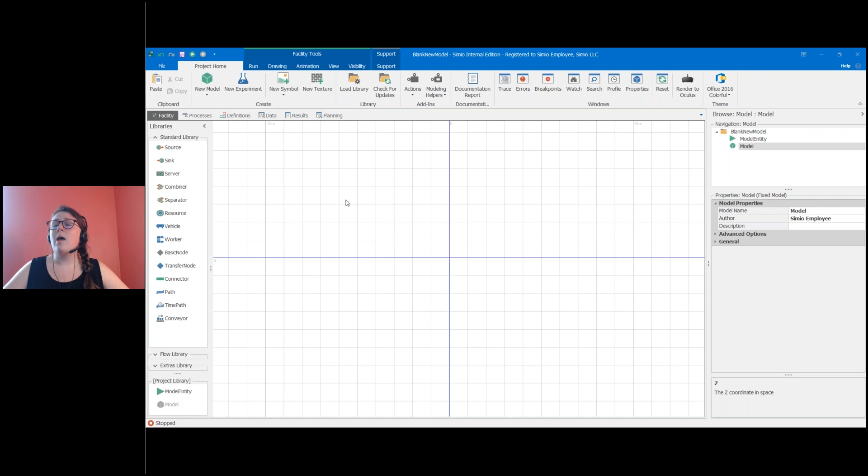So with that, let's jump into Simio. And here is my blank model. First, we're going to talk about getting data into Simio.

So you can just type your data into Simio, or you could copy and paste your data into Simio. But one of the quickest ways to get data into Simio is to import it. So you can import it with a table data binding.

So first, we have to have a table to put our information into. But then after that, we can create up our data binding. So if we go to content, create binding, you can see we have options here.

So you could import from an MES system, or you could import from a database or Excel, but today we're going to do CSV. So I select CSV, and we see we have some information to fill out here. You don't have to fill it out now, you can fill it out later. You can close it, but we're going to fill out some of this now.

So we're going to select the folder where all of our CSV files live. Let me get here really quickly. Okay, so I have my data folder. I have my layout information in this layout folder.

So I specify my folder, and then I need to specify the specific file in that folder. Here I have multiple files. These are the objects I want to be creating today, but we're going to start with racks.

So I've hooked up my data binding, and then I have to import the data. So I import it, and I can see that Simio made my data table schema for me - it set up my column names. I could have had these set up before.

I could have said, these are the columns I know I want to import, and then I could have just added the data into that. Or if you don't specify that, like we just saw, it'll create your data table schema for you, which is really nifty. So here's all my data.

If I go back to my facility, I can see nothing's really happened yet. We have yet to turn on the switch to data generate our objects, but it's very simple. Before we do that though, there's a few things we need to clean up. So Simio is going to do its best to try to make sense of the information you're putting into it.

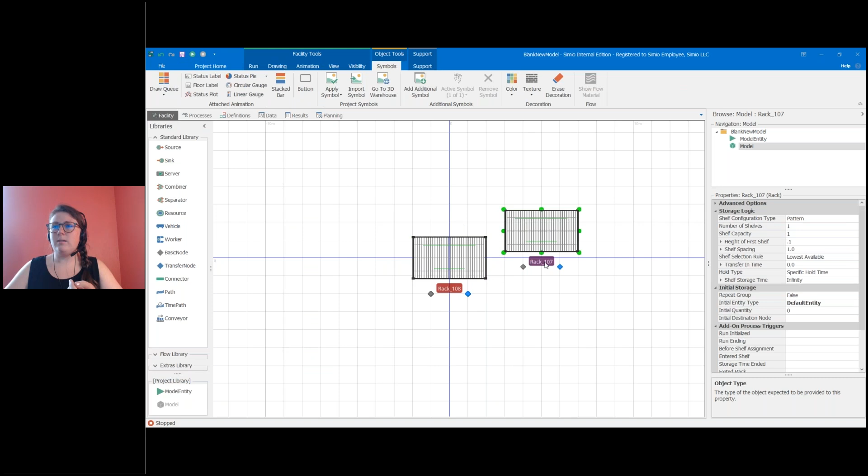Great. So all the errors are gone because I said I've created these with my data. And I go to my facility and I see they're here, but they are all in this center area because I did not hook up any of my other information. So we do need to do that fairly quickly.

So I can go back to my data table, select rack, go to the initial physical characteristics, and I could type a value in here, but this is applied to the whole column. So all of the racks would follow that rule. But I want each rack to be at a unique location. So I can instead say the unique value column here.

So I have my X location, my Z location. So if I reference the column instead, so X location and Z location, I can see that each rack is going to use its own value for these two columns. So I can go back to my facility, and now I can see I have something that looks a bit more like a warehouse layout.

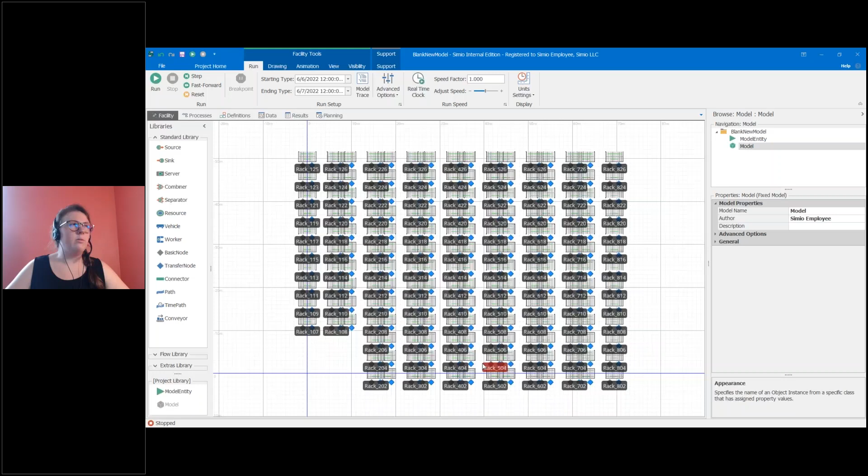I have my racks spaced out, but they are facing the wrong way. So this is where the orientation comes into play. And so we can go back to that same location and change the yaw. So the yaw is which way the object is going to be facing. And again, I want to reference the orientation column because some of my racks are going to be facing 180, some are going to be facing 0. And I go back to my facility and I could see that things have gotten lined up a lot better now. Okay.

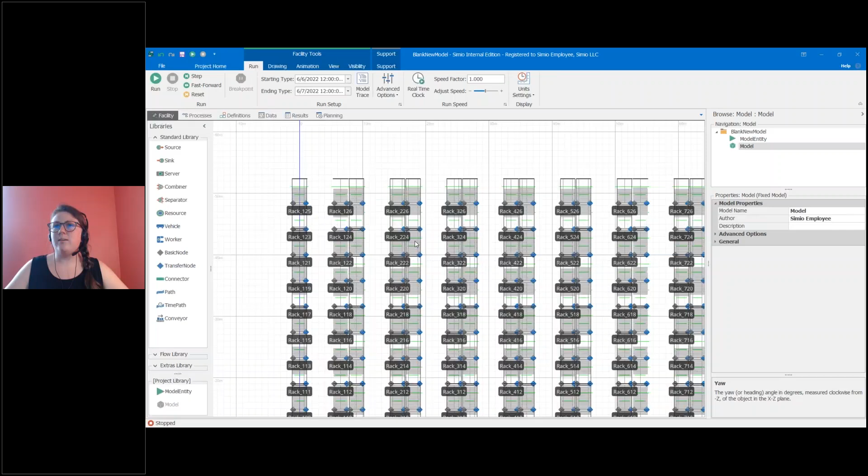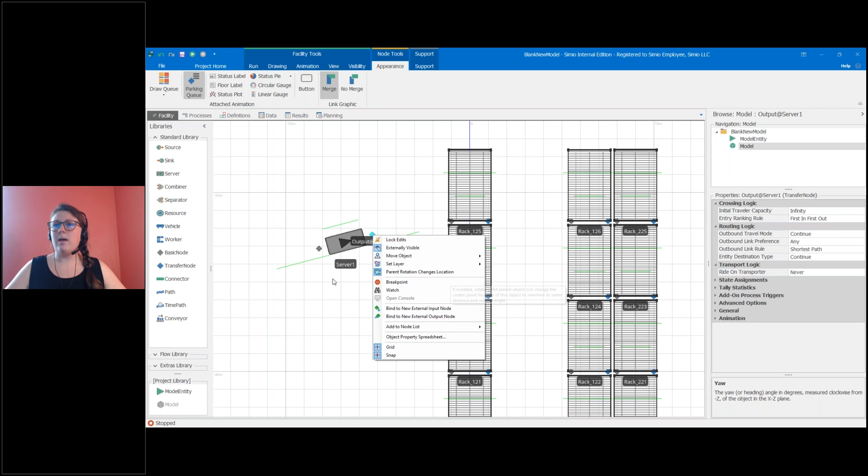With the rack, we have our input and output nodes, and you can see that those didn't move correctly. So I just want to take a moment and talk about this. With the server object, if we wanted to rotate this, you can hold control and click one of these handles and rotate and kind of just drag around. And you'll see that the queues and the nodes are moving with the server. That is because if you right click on the node, you can see it has this parent rotation changes location active. And same with the queue. The queue has two different options because it can move in different ways.

But if we click on our rack, we can see that we don't have that turned on right now. So we're going to want to turn that on. And I could click on each of these nodes and turn that on, but that's not really going to solve our problem because we want it to be applied to all of our rack objects. So what I'm going to do instead is I'm going to make a custom rack object so that I can make that the default value. So any rack I create from that custom rack object definition will have that rule applied to it.

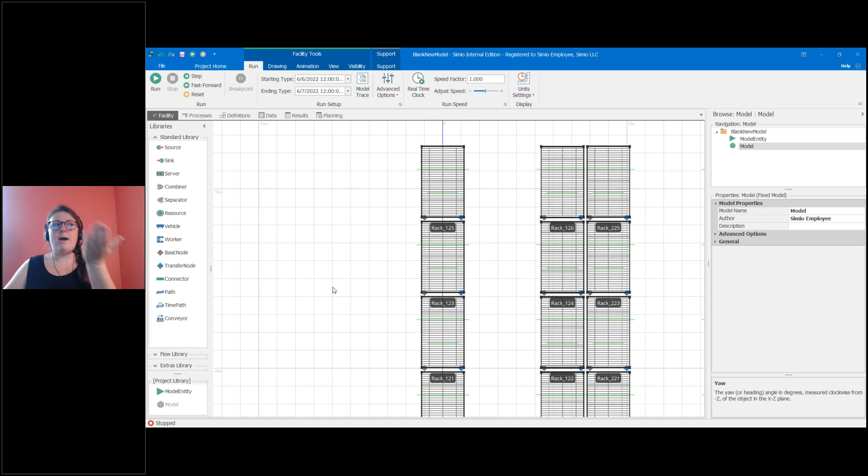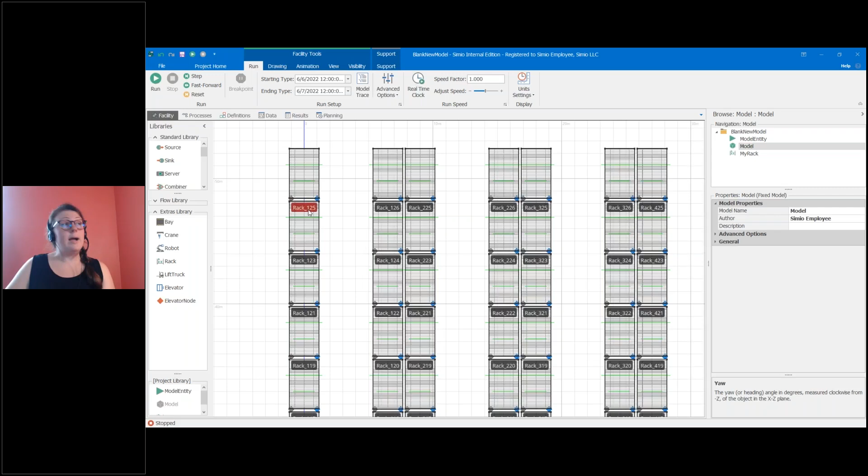So here I'm going to go to definitions, external, and I see that these are my external nodes that get created when I place my rack. And I can right click and I can set this as the default value for these nodes. So now I see it's enabled. Okay, if I go back to my model though, I see that nothing's really changed. Well, the racks I created were created using this rack definition. I need to change it so it's using my new MyRack definition.

So we're gonna go to data, and all we have to do is change that object type. So I can go here and I could do, oops, MyRack. And it's gonna take a moment because it has a couple hundred racks to do. We'll just let that think for a second.

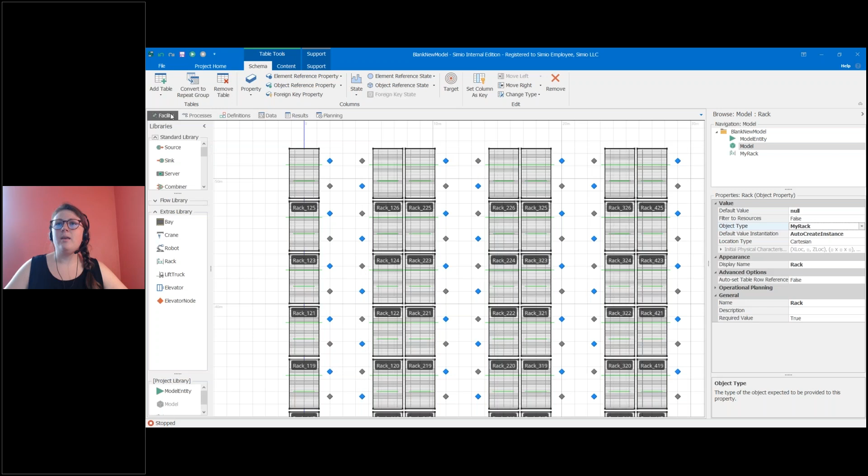And now I see that my nodes are in a better position and line up with the way that my rack has been oriented. Okay, great. The last thing I want to do is make sure when I auto create, each row in my data is its own instance. So this is a rack instance and this is a rack instance.

But when you're auto creating, the rack doesn't automatically know its row. There's a setting you have to turn on, auto set table row reference, and you can change that to true. And so then each instance will recognize its row, and then you could use information in this data table later on.

Hey, Liz, let me ask a question that just popped in here that's very relevant. So, do the CSV files have the field names as the first row, and is a header required?

So the data that I had, I did have my column names in my data table. So maybe I could show that really quickly. Oops, popped up over here. But yes, my first row was my column titles. So you could include that in your data. If you don't, there are settings, I think, when you're setting your data binding to exclude the headers or say that there is no headers, and then it'll just come in with unnamed columns.

If you don't select that option, it is automatically going to try to use your first row as your table headings. So if I didn't have this row, it would have tried to use this information. So you do want to be a little wary of that and make sure you change that setting if you don't anticipate having column titles in your data. But yeah, those are all settings that you could change.

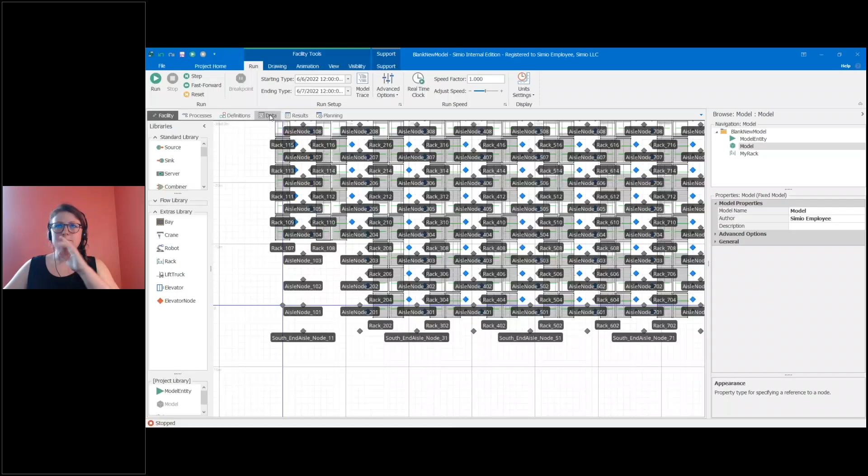And I can go to my facility and see that I now have a bunch of nodes in between, marking out my aisleways between the racks. So for the sake of time, I'm going to skip showing how to do the other tables because it's a very similar process. So we're going to jump to another model.

Hold on. Another question. So in the rack table, is it possible to specify relative locations of input output nodes with respect to each other?

So the rack definition is going to create those nodes for you. So you would have to specify that in the rack definition, or you could have your rack definition not create those nodes and then create different nodes in the data tables. So there'd be a few different ways you could set it up. It would really depend on you changing your rack definition. But let me just jump back into that for a second, actually.

So what I'm saying is the rack is creating these nodes here, and you could move them around and then auto create your rack, and it would change. So I'd have to update this for a second. But if you wanted to specify different locations for your input and output, you would probably need to create different nodes. They would need to be their own node definition, if that makes sense. Really, really quick.

Okay. So we see that now when I recreated them, the nodes have moved locations. So you would specify it in your definition, but you could choose to not create these nodes and then have a table with all your other nodes creating different inputs and outputs for that.

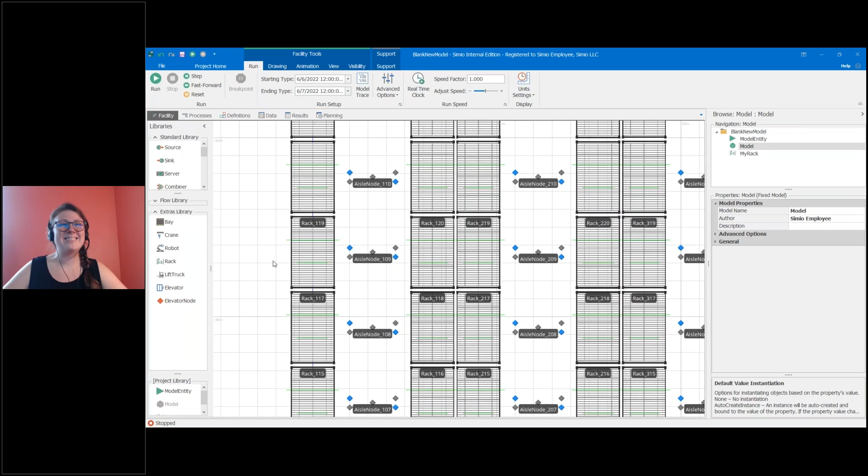Perfect. Clarification on that, yeah, you can email and we can talk about that more later. Okay. And we also have user participation occurring as well. So someone else is jumping in and answering questions as well in there. So that's great. Awesome. Okay, perfect.

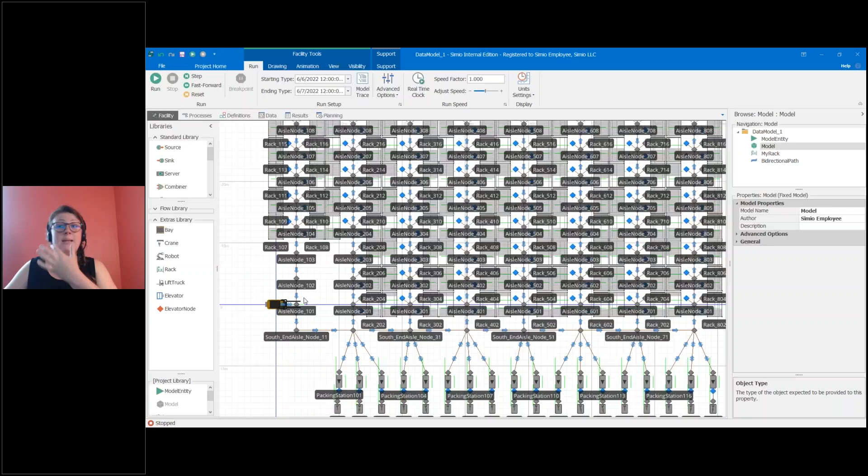Okay, so we're going to jump over to a different model where I have auto-created paths, resources, so my forklift and some workers who work at my picking stations or my packing stations, some sinks and the packing stations. So these are all just different pieces, like files of data that I've imported as a table and done those steps that we have just seen. So now we see it's created all of these lovely objects, and it was pretty simple to do. You're just importing, kind of formatting a little bit, making sure everything's hooked up in Simio correctly.

All right, awesome. So it's a little busy, so I'm going to turn some of these things off for a second. But we can see this model. If we hit run, it's actually not going to do much of anything yet. We haven't created any entities or hooked up any other pieces of information in there. So we're actually going to switch gears and talk about data-driven approach now. So what we just did was data generated, and then we're going to move to a data-driven approach. And these are two different approaches. You can do one without the other.

So we could have just had our data generated objects, and we could click on each of these and fill in the information about the racks and whatnot, and click on these servers and fill in the information here, so that would be just data generated, or you could do vice versa and only do data driven. Entirely up to you, but the two approaches work really well hand in hand, because you can quickly input the data that you need for these objects into data tables and then create the objects. Okay, let's jump back to the presentation for a second.

And so moving on to data-driven approach. So data-driven is your data is organized into tables, just as we've been doing. And again, you can type this in or you can import the information as we have done from an external file. And what this is, you're using the data in your tables to drive your objects. So you're going to plug in your table references into your objects, and it's going to be a generic table reference, which is really nice because it's repeatable very easily across multiple objects.

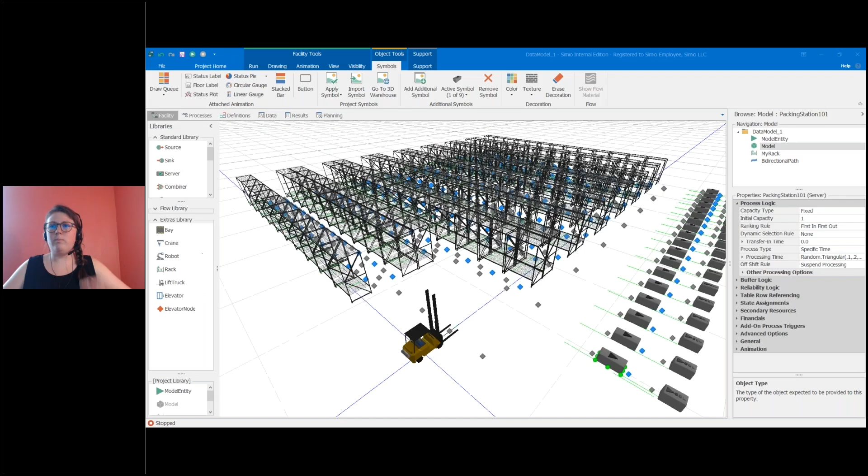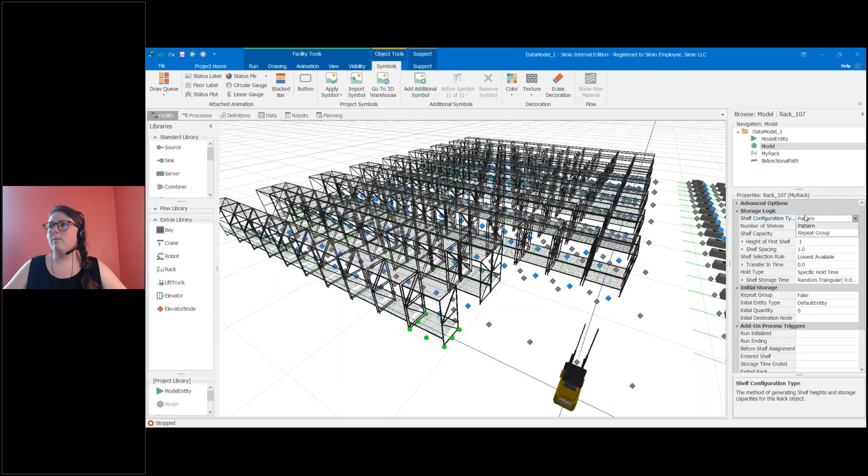So we're going to want to give some information to the racks to create these shelves. So with the rack object specifically, we have the ability to create shelves at different levels. So you can specify how many shelves you want, what's the pattern, how many entities are allowed to fit on a shelf, and so on. So by default, that is a pattern option, but we also have this option to do a repeat group. And what the repeat group lets us do is have each of these shelves be unique. So instead of saying I need 3 shelves and they all have to be evenly spaced,

here we could say I have shelf 1. So shelf 1 is at height 1 and it can hold maybe 10 things because it's a bottom shelf. And maybe I want to add a second shelf and that's going to be shelf 2. And I only want to move it up a little bit. So it'll be 1.5, a little bit higher than the first shelf. And it can only hold 5 things because it's a little bit higher. We want to put less on it or something like that.

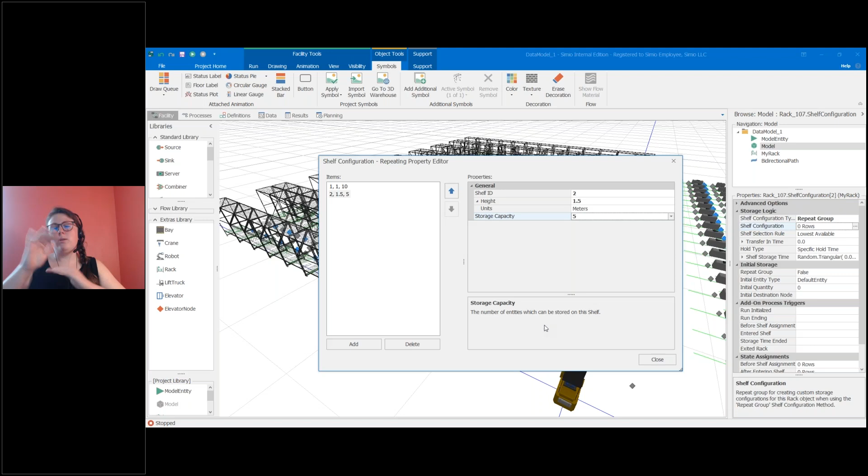So the repeat group allows us to create shelves with unique information. So I could go into each of my racks and I could add this, or I could put it into a data table. So my data table holds all of the unique information about my shelves, which is what we're going to do. So let me just delete these.

So repeat groups hook up very well into data tables because they're actually very similar structures. And if you ever need to get more information about repeat groups and what that might look like in a table structure, we actually have our data table schemas. So if you add a table, you can go to add a data table from schema, and we have all of our options here, and these are all of our objects and our elements.

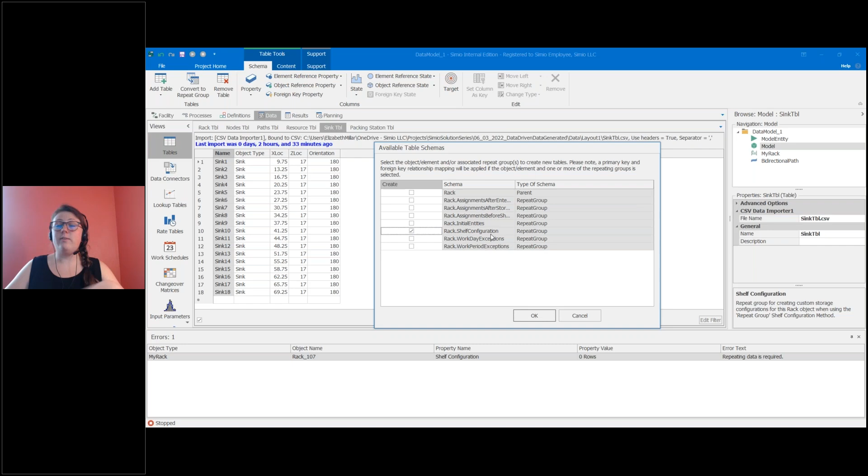And so for example, let's go to rack. That's what we're working with. And you'll see for the rack, we could make a parent. So that would be like the rack's properties in a data table, or we could create one of its repeat groups. So here we're just going to quickly look at shelf configuration. That was the repeat group we were looking at. And if I add that in, it's going to make a table for me that has the columns that correspond to the properties that were in that repeat group.

So if you ever need some assistance in setting up your data table schemas, that's a good way to look at it and just get an idea of what these columns might be. Okay, I'm actually going to delete these columns because I want my data import to create them for me like we've done before, just because my columns are set up a little bit differently. So here we're going to do the same thing where I take my same binding, and select my file from my shelf configurations, import this, and make a few changes.

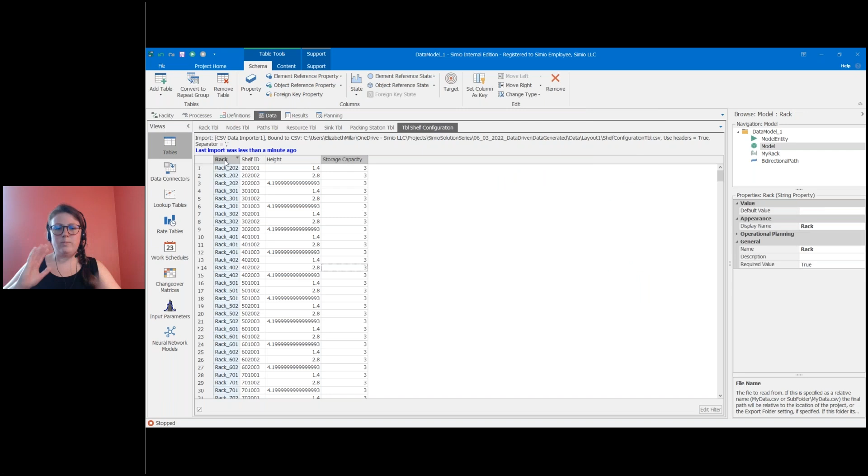I want my shelf ID to be a string instead of a number, since I only have numbers here. We're going to change that quickly. And this is where we want to introduce the idea of table relationships. So here I have three shelves per rack. So I have this rack specified, and it's going to have a unique shelf. But this is where we want to relate all of these shelves to the one rack.

So I have this column, and I actually want this to be set up as a table relationship. So I'm going to go back to my rack table, and I'm going to say, hey, I have these racks, and I want them to be a key. So I'm going to set this column as a key. So each rack is one key, and it's going to relate back to this shelf table. And this column is going to be a foreign key. So I'm going to change this to a foreign key.

And it's going to say, okay, I know that rack 202 has these three shelves, and it relates back to the same key. So I've used this key 3 times. So if I go back to my rack table, I can now expand this and get this master detail view. So I see that rack 202 relates to these three shelves. So this is where the power of table relationships comes in, where you can say, I have this main piece of information and it's going to relate to maybe the subset of information. So in this case, I have this main rack and it's going to relate to these shelves.

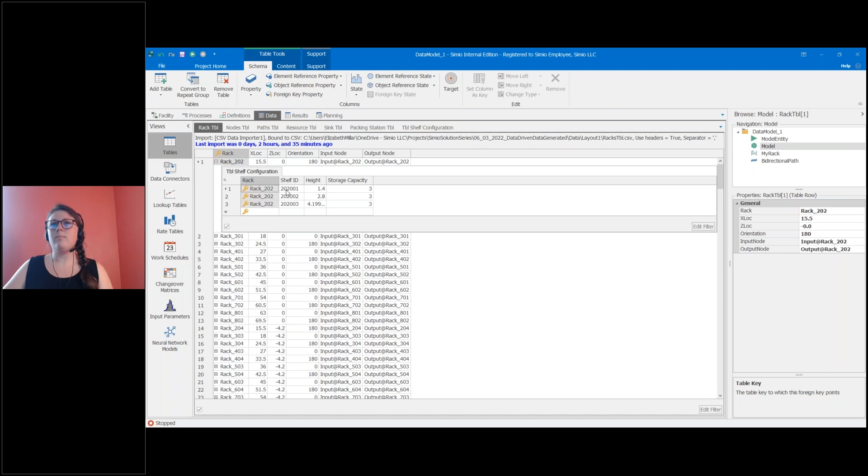All right. So going to facility, I can click on my rack and I could say, for my shelf configuration, I would like to use that shelf table we just added in. So my table shelf configuration. Okay, so I right-clicked on the repeat group and I set this reference at the top level, and I could still click into the repeat group and see that all of my columns in my data table hooked up to the properties in the repeat group. So we have this all set up.

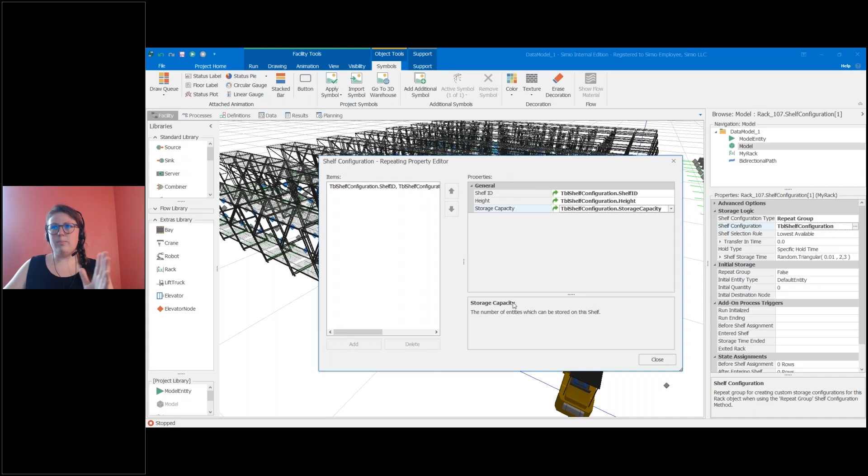So when this rack goes to create its shelves in the beginning of the run, it's going to say, okay, I have these 3 shelves to create and they have this information. But this is only applied to this one rack. So I could do the same thing. I could click on this rack and add that same information and change these properties. Or what I could do is say, this is going to be the default for my rack definition.

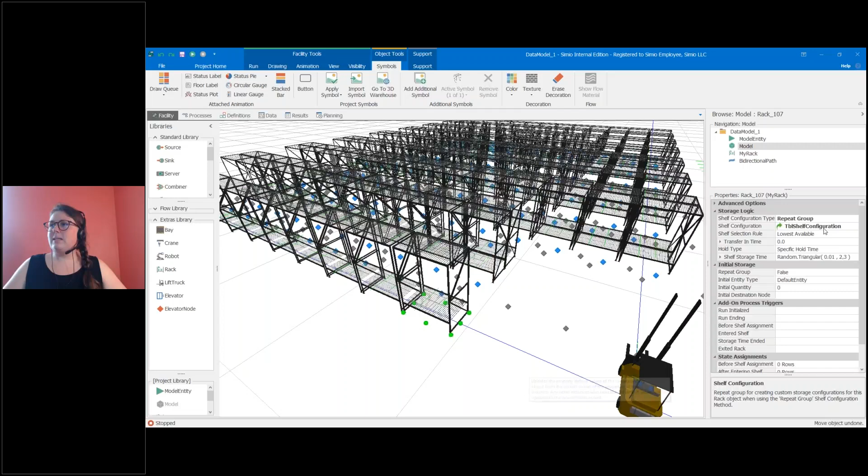And I could do that very simply by right-clicking on the instance I have changed. And I could say, update my rack property defaults from this. So this is updating my object definition. And I could see that this unbolds, meaning that it's now a default. And I could click on all of my other racks and see that it is the same values now. So it has applied that default property values across all of the other racks that are from that definition.

Run. I can see that I have shelves created, which is great. But I have yet to have entities. So we actually need to do one other quick thing, and that is give an initial quantity. So I'm just going to say 9 because I have 9 spaces in my rack. And again, I want to update. So all of my racks are going to have initial quantity of 9.

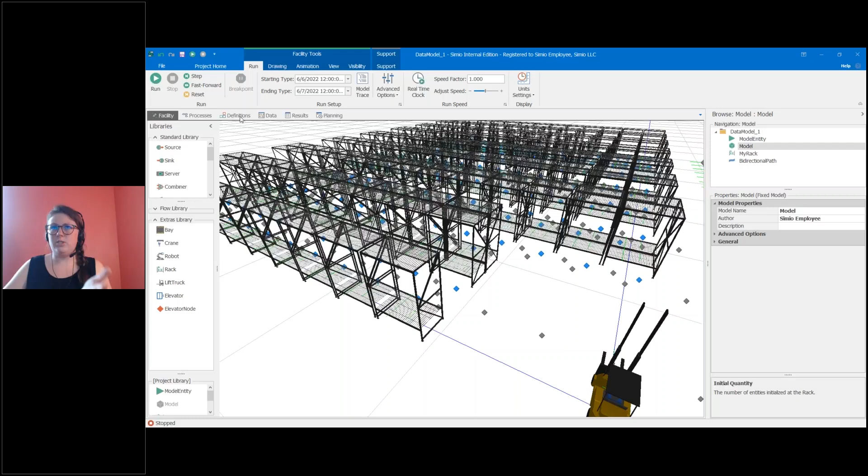But that is information you could also store in a data table. So maybe you have your data table specifying, we have this stock at these shelves, and you could hook that up to these properties and say, I want this entity to start at this shelf. All right, so now if I run, I see my entities on my shelves.

Great. And then one other thing I wanted to show is in your shelf table. So again, the power of having this be in a data table or use that shelf configuration repeat group is that you can have unique values for each of these shelves. So let's say I wanted to change this where I actually wanted my highest shelf to only be able to hold one entity. Right now, everything holds 3 entities.

So with your data tables, you can filter on certain items. So you could use that little key up here and you could select certain things. Or you can use this auto filter row, which is really nifty and lets you filter on different kinds of criteria. So here we're going to select ends with, and I'm going to say I want all of my shelves to end with 3 because my shelf IDs, the third one is the highest shelf. So here I have all of my 3s,

and I could change this to say I only want to hold 1. Oh, since this is still bound, I would need to remove the binding. So I'm going to remove the binding really quickly because if I have the binding, it's going to want to stay true to that data file that it is bound to. So if I remove the binding, now I can edit this and I can say 1.

And again, our data tables are copy and paste friendly, so I can select all of these cells very quickly and paste them in. And I'm just showing this, but instead of doing this, you could have another data file with maybe a different configuration of shelves. So you could test different shelf configurations and you could import different files. So you can kind of have an experiment where you're changing your files.

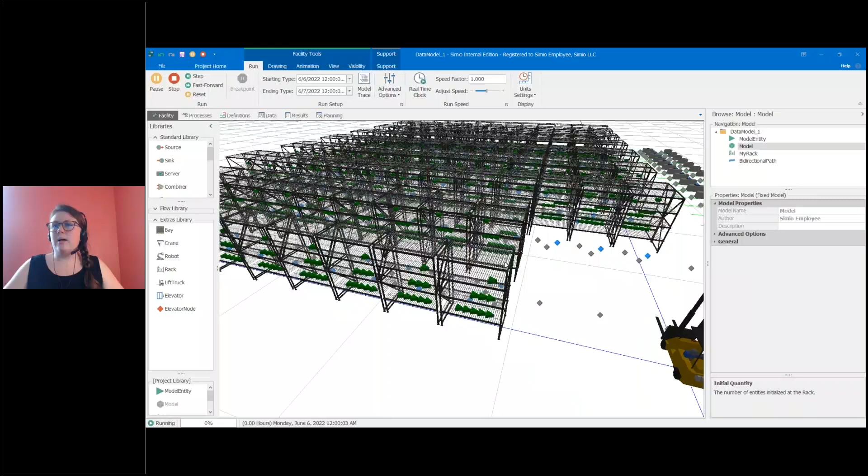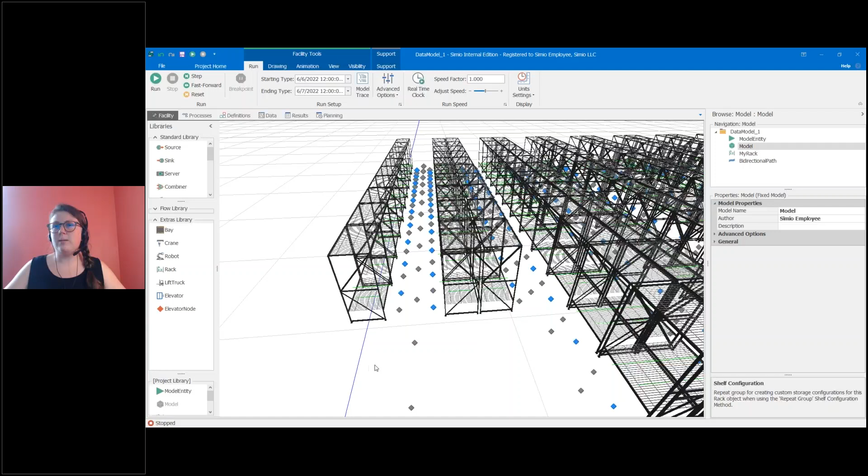And one other thing I wanted to show, so now our shelves are data driven. They're using the information from our shelf data table to create the shelves. But I also want to have my entities routed using the data tables. So as the entities leave the rack, they, one, need to request a ride from the forklift. So we're going to need to change that on our output node.

So that's where we say, does it need a transporter? And we're going to say always. And we're going to say we need a forklift. So that was another one of our objects we had data generated. So here's our forklift. And I want to say, instead of continuing, we're going to select a location from a list. So our data tables can actually also be lists.

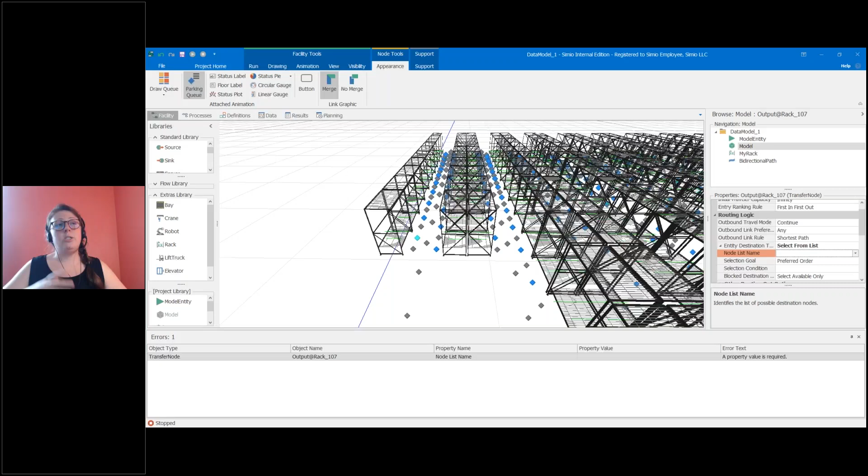So if I go back to the data table, the packing station is where I want the entity to go after it's taken off of the rack. And in my packing station data table, I have this column for input node. So here I'm saying these are my input locations to my packing stations. I could use this column as my node list, which is what we're going to do. So I can go back to my facility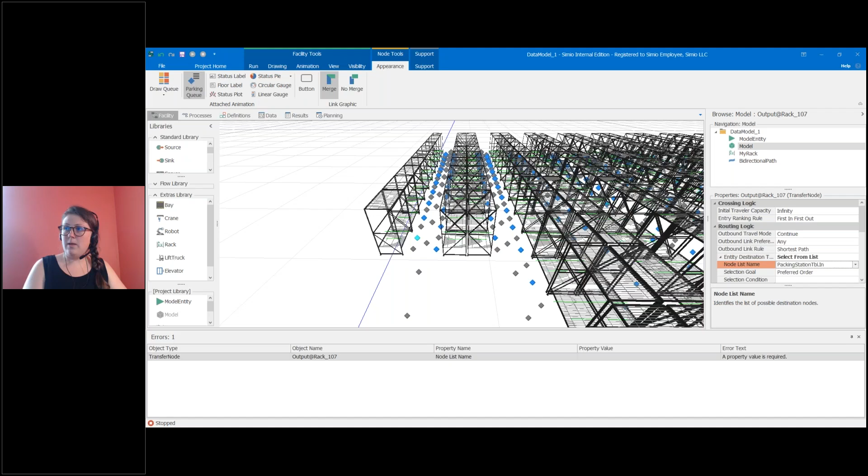and we're going to do packing station table dot input node. And oops, I did not type node. Perfect. Okay, so now when I select from the list, I'm going to look at that data table column for the nodes, and we're going to select something from there.

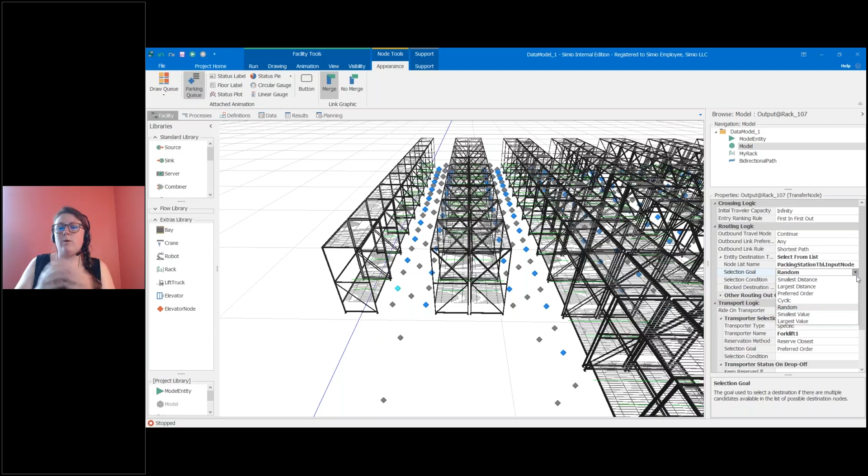And just for this example, I'm going to choose random, but this is a location where maybe you could think about, which packing station do I want to go to? Am I trying to match up with another order? Am I picking different things to put together for an order? So maybe I need to check for that. Or maybe I just want to go to a packing station that's available, least busy, something like that. So we're just going to go with random.

I've only set this for this one rack, and this is the node associated with that rack. So if I go to this node, it doesn't have any of that information, but I can do that little trick to right click and say update rack property defaults from this. And it's unbolded now. We can click here and see that this is also updated to say I need a forklift, and we're going to select from a list and so on.

All right, choose the speed and let that run, and we're going to see that our forklift is going to go and pick things up and drop things off at one of our packing stations.

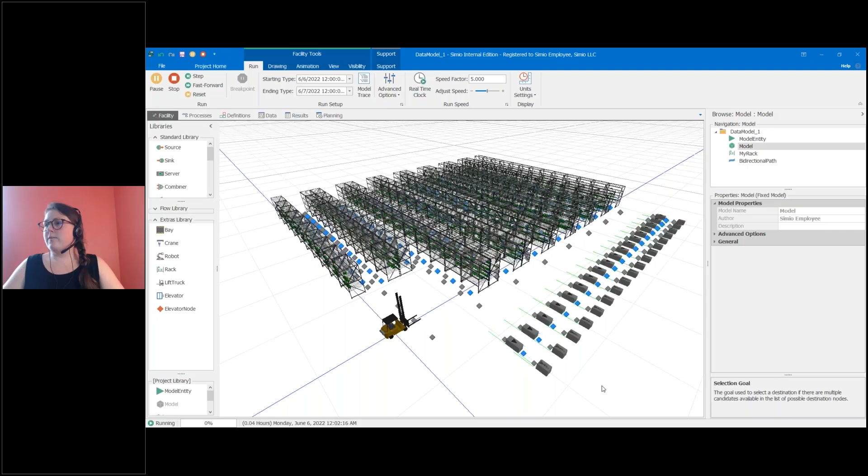I'm going to skip through a couple things, but there are a couple other enhancements you could make to this model, like also having it be data driven. So you could select a server and change its processing time, and that processing time could be read in from your data table. Maybe your data table has different processing times for each packing station.

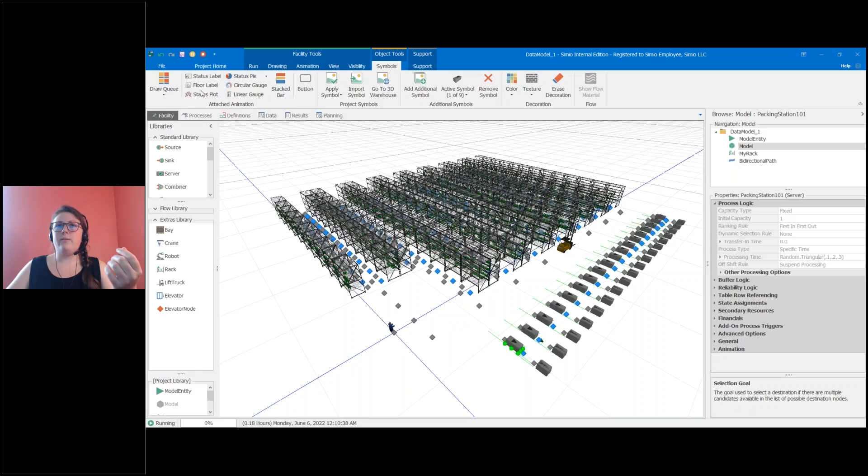Or for our worker and our forklift, we could change the population number. If I pause this for a second and go back to data, we have our resource table, and we have this column here for population. So we could hook up this column to our worker and our forklift, and say we would like you to use... oh, it needs to be an integer—can't have not a whole forklift. So you can say use this table reference as the population.

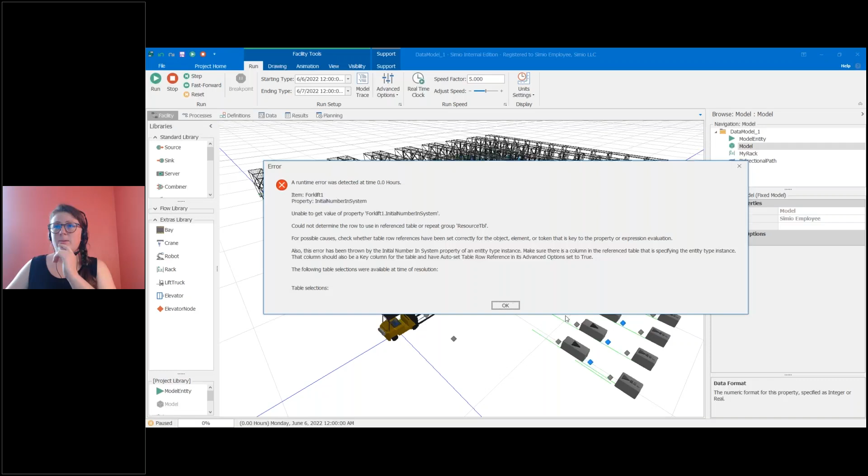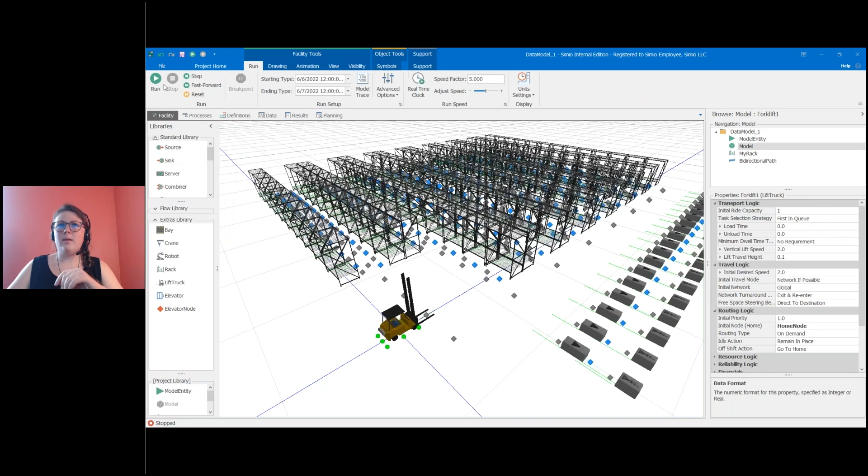If I hit run now... oops, it did not know which row to use, and that is because this needs to be a key. So now I should have multiple... oh, nope, we're still only doing one. Okay, well that is something you could set up. I'm not sure why... oh, they're on top of each other. Okay yeah, so we should see 3 forklifts as we run this model.

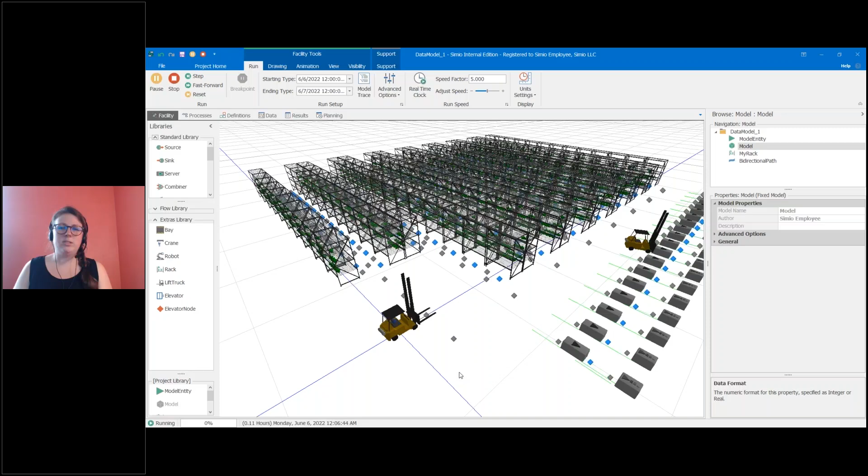And that could be something you could consider making multiple files for. So if you had a bunch of different vehicles or workers and you had population specified in a table, we could see changing that file and trying different populations. So you could change the file to change the population number instead of making that a reference property and changing it in an experiment. Okay, so we see our 3 forklifts now moving around.

Awesome. All right, a few other things I wanted to get to before we get to the questions, and that is showing some of the other things you might think about doing with your data tables. For example, we now have these shelves individually listed out. So if you wanted to collect information on each of the shelves, you can consider doing that, like adding more columns, adding a state column, and maybe counting something.

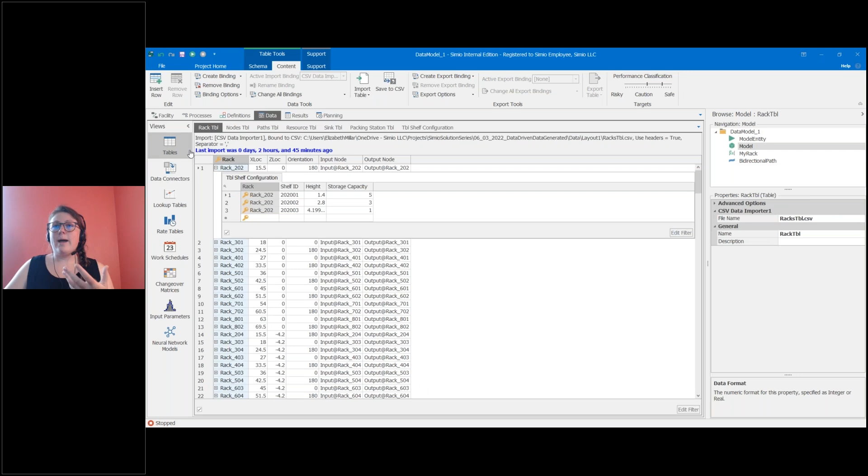The shelves are going to have information they automatically collect, but if you wanted to collect your own statistics, you could think about adding that in here, because now we have this shelf detailed data table. Similarly, for the rack, you could think about collecting how much weight is being stored on a rack. So we could consider adding in a state column and saying this is a state variable—each one of these cells is a variable that corresponds to this row.

You can see that's grayed out and I can't type anything in there, and that's because this is only assignable during the run, so you're going to update this value as your model runs. So the state column could be the weight. We could collect the weight as entities are put onto a shelf, add the weight, or as they're removed from the shelf, subtract the weight from this state variable. And then we could also think about auto-creating elements.

As I said before, you can create the objects, but you can also auto-create elements. You'll see we have our element column properties up here. So let's say we wanted to collect a state statistic—over here we have the option to reference or to create. If we create, we can set initial property values. So if I open this, I could say what is the state that I want to collect? The state variable name, and it could be that state column we just created—so it could be rack table dot real state 1. So it's going to look at the state variable that is in the state column, which is really cool.

So why are we doing this?

Maybe we're using that state to collect the weight of the rack, and maybe we want a state statistic because we want to be able to see what the rack's weight is over the span of the run. So the state statistic is going to be a time-dependent statistic. You could see how it changes throughout the run.

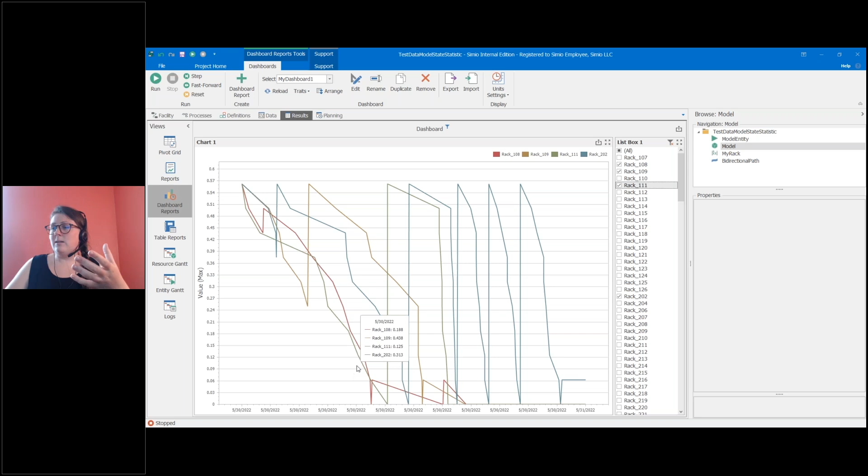The last thing I wanted to talk about was experimenting with your data bindings. As I first showed, we imported our data and created this data binding, or data connector, our CSV connector. If you go to data connectors, you get a summary of where this data connector is used, what tables are hooked up to it, and what this import folder is.

And we could create more data importers. But what's actually a little bit easier, I think, is to create different configurations for each data importer. So here I could add a configuration, or just leave it defaultly named. And this one lets me change the folder that I'm looking at.

So maybe instead of my layout 1 folder, I want to look at my data for layout 2. So I could say look at layout 2, and if the files were named differently, I could specify the file names. They happen to be named the same. So I could hook up which file goes to which table and all of that.

So jumping to, I hooked that up previously. Here I have different layouts. I have, maybe I want to experiment with different row and column numbers for how my racks are laid out. So this was our general layout that we started with, but my layout 2 changes that formation.

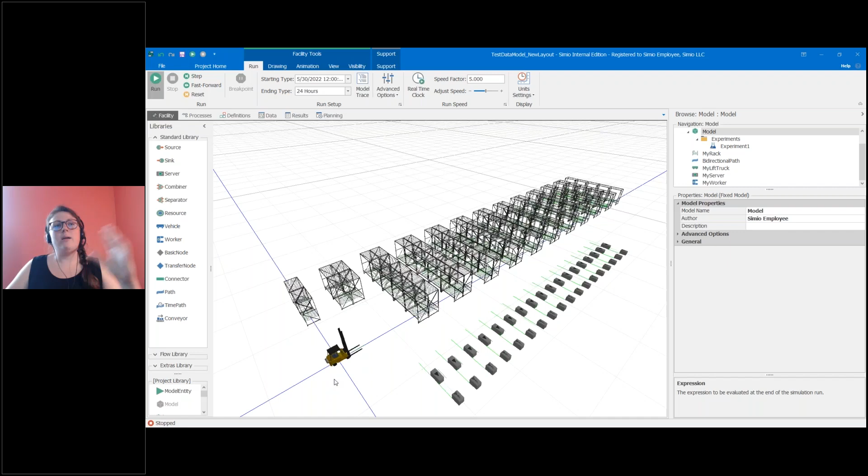So we're going to change from default to layout 2, and I can just select that configuration and say import all of the matching bindings, and it's going to say I imported new information for these tables, and I'll say okay. I can go to my facility and see that now I have this longer layout for my racks. So I could experiment, maybe keeping track of how much distance my forklifts or my workers are covering if I have a different layout.

There's something else I did similarly. So I have these configurations. You can create an experiment, and you can actually select these configurations as like a control for your experiment. So you could say, I want to do default 1, and maybe I want to add, let's add something in here.

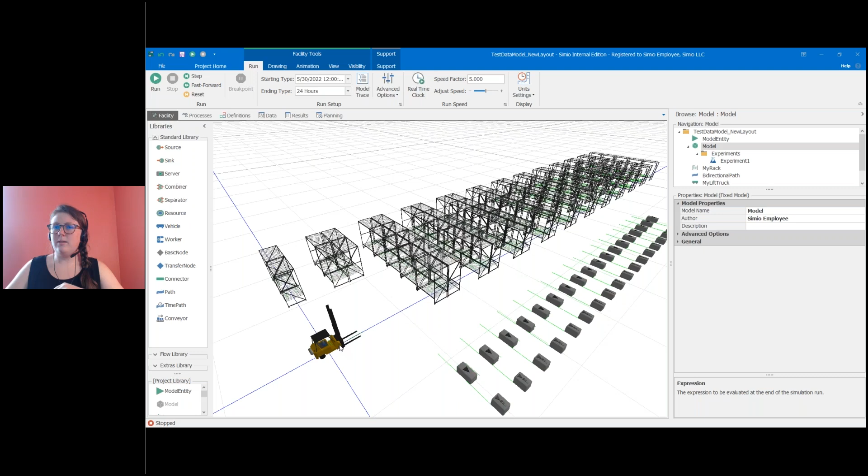We're just going to add a property. So you have your reference properties that you're maybe experimenting with, and then as you're experimenting with your different population sizes, your different workers, different work schedules, and so on, you also have that CSV configuration that you could experiment with. So maybe you want 6 workers and then you want to try that with the default layout, or 6 workers with layout 2, and so on.

And this also works with OptQuest, so you can use optimization and change your data importer configurations, and it'll import all of your new data tables, and it could change the objects that are being created, or just change the information that the objects are using.

I think that's about everything I wanted to show. So I think we could move on to FAQs now, or sorry, our questions section.

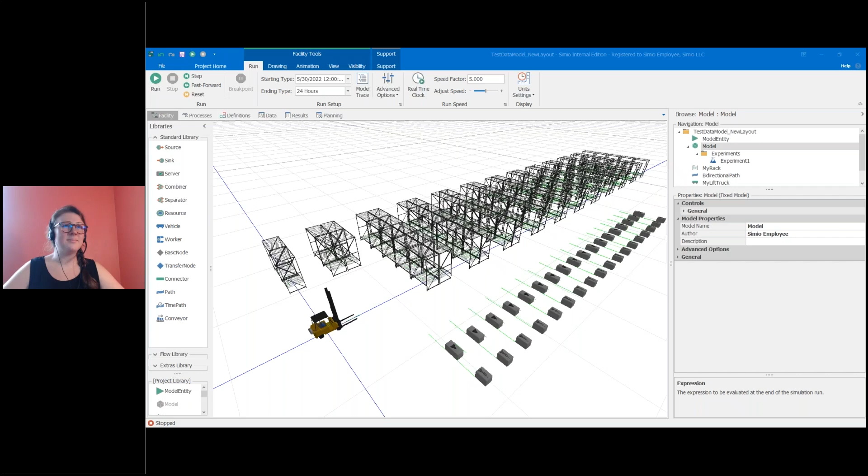All right, perfect, thank you. Next question: how do I move or change a data-created object or link? That's a great question.

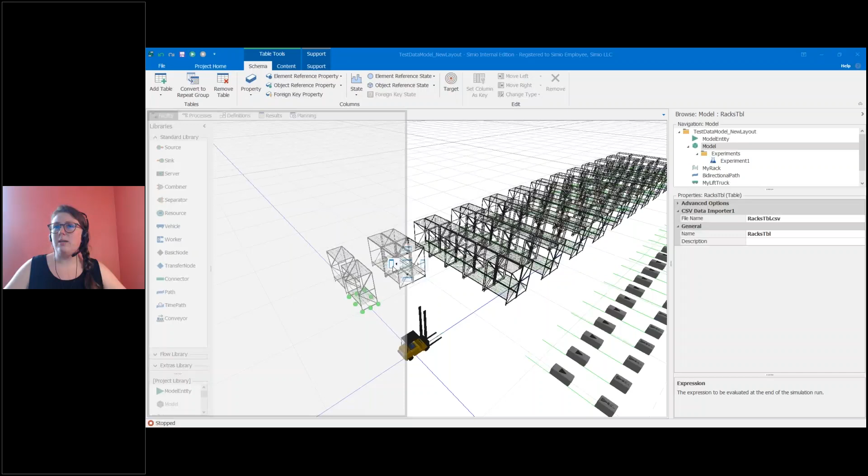So if you are creating your objects with data, you can slide them around, you can move them. As I'm here, you can see I'm moving this around. I actually wanted to show this, so I have my rack table and I'm going to undock this and split screen it so we can see. This should be rack 202, and you can see as I slide it around... oops, let me get a handle on it. As I slide it around, it should have updated.

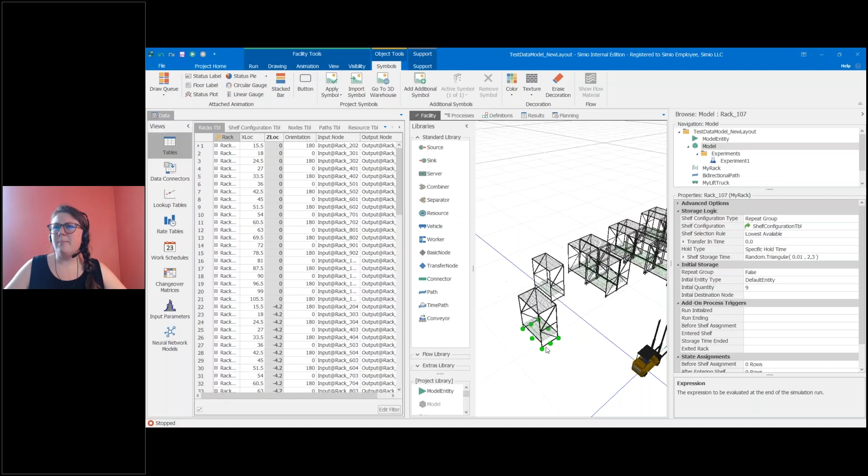Hmm, so it would update, let's see, I think it's because... okay, so you can unbind them. You can always unbind your data tables and move things. I'm not sure why it's not doing it right now, but typically it should update. Am I grabbing the right rack? Rack 202. Oh, that's why, we're looking at the wrong rack. Okay, so rack 1... okay, 202 should be over here.

All right, rack 202, as I move it around, or make it very large, as I move rack 202 around, it should update its X and Z locations in the table. And it would do that if I had left my binding there as well. So you can slide your things around after you create them with your data, and it's nice that Simio is keeping track of that for you.

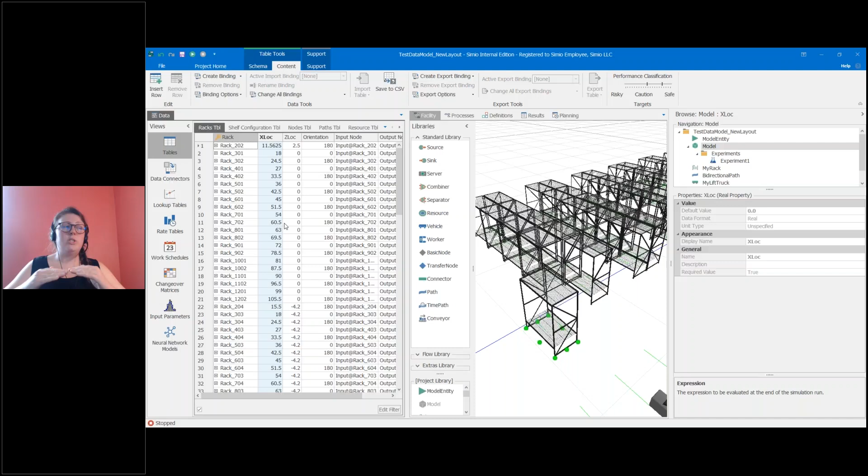But as soon as you import from your external file, it's going to replace whatever data was in your data table, so it'll go back to the original X and Z coordinates. If you were moving things around and wanted to make sure that the next time you import your data they stay where you moved them, I'd recommend exporting your data table. You can export really simply, just save to CSV, and next time you go to import, change to import from that file you saved.

With paths, they're a little more specific because you have a specified starting and ending location for your path, and you can't add vertices and drag those as well. You could move the nodes, but you couldn't drag and add vertices to the path. If you wanted to add vertices, you would have to add a table to specify your vertices or add information to your data table to specify vertices for your path. So paths are a little bit special in that way.

Perfect, perfect, all right, next question. So first of all too, I love the giant rack. All the other racks look very small.

Is it possible to bind the model to SharePoint Online Excel files using a URL? Oh boy.

So I think that gets into a little bit of our web API data connector, which is not my strongest suit. So I might recommend emailing into us and we can get you more information on that. I think it might be possible, but we don't see that commonly done today. I don't have a lot of experience with that, but we could maybe make something work.

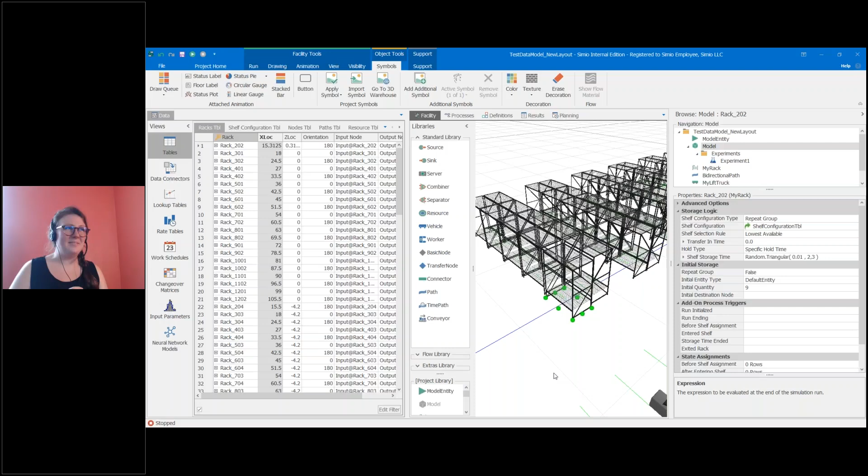So another binding question: is it possible to bind the Simio model to MES for real-time synchronization with the physical system? Yes, it is definitely possible. I think we briefly showed it. So if I go back to data, I'm going to re-put this in here so we can see better. You can see that one of our options here is an MES data importer option. So you can hook up to that and you can import in real time. And you do have other options for your bindings as far as how frequently you want your data to change and be imported in and updated. So you have options there.

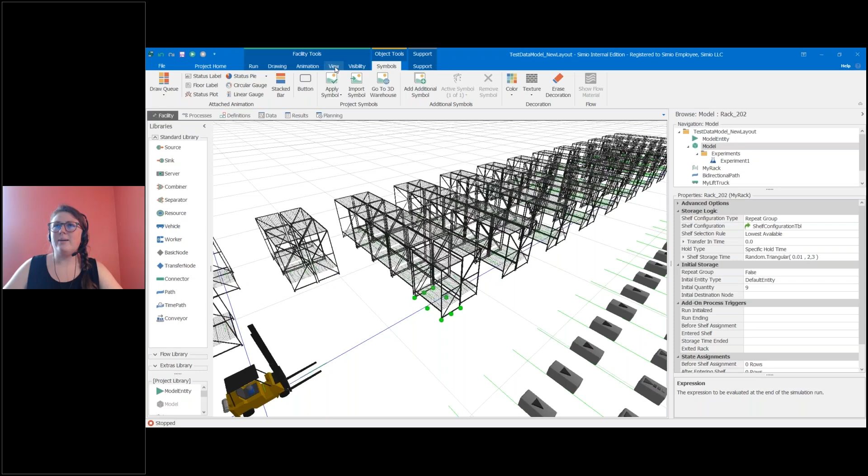All right, great. What is the best way to set link selection weights through data? Sure. Let's talk about that. So actually, let me turn my links back on so we can see that. So here I have my links, my arrows and my nodes so we can take a look at this again.

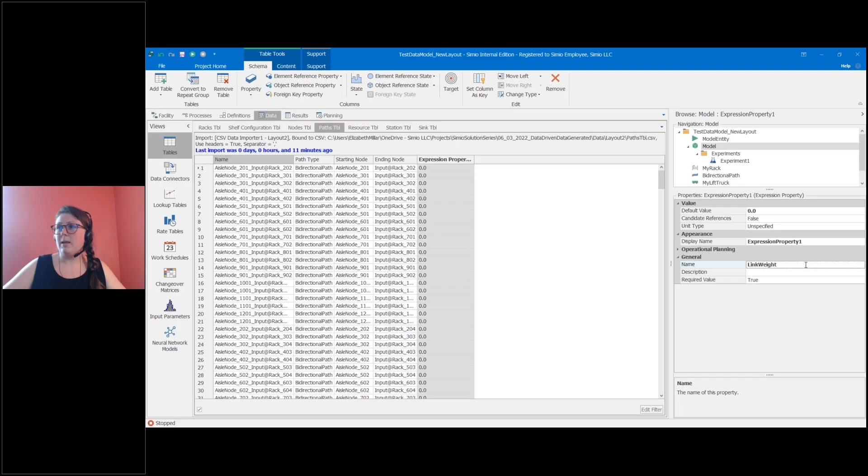So if you wanted to change your link selection weight, and you're doing a data-driven or a data-generated approach, the selection weight is a property. So what you could do is you could go into your data table where you have your paths, and you could add just another column for this information. So you could just say it's an expression. And so this could be my link weight. And you could type in anything here, and it could just be, at this path, I want to use this link weight. Oh, my data binding's preventing me from typing.

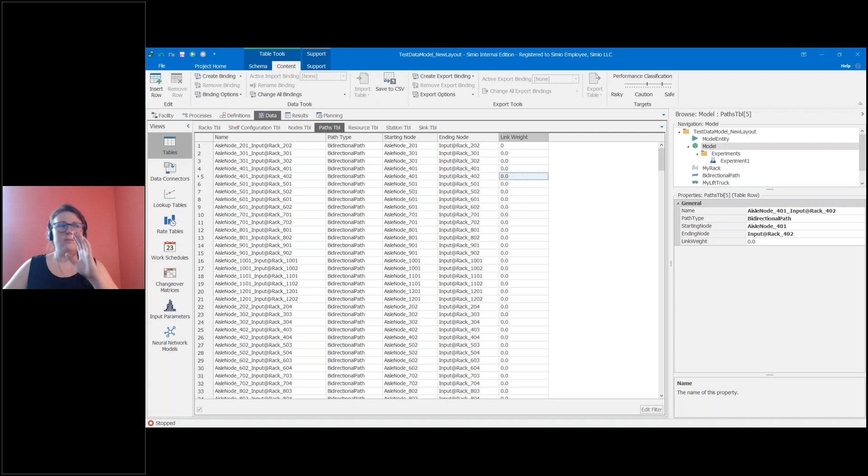So yeah, you could write in any expression. So you could say, is this a model entity, or making sure it has a specific variable, and then you would do that same thing we did before, where I have this now in my data table, and I want to hook it up for my objects to use it. So then you could say selection weight, reference my paths link weight.

And again, you would need a custom object so that you could say this is the default. This is the new default for all of the paths I create. I want them all to use this table reference. So that's one way you could kind of hook that up and use the link weights in your data tables.

Okay. One more question here, and this one I know it's a little bit of a longer answer. So with about 4 minutes left, I'll pose the question if you want to address it to the best of your ability in the next three and a half minutes. How would you approach modeling each shelf having 5 storage locations and storing entities in specific locations on the shelf?

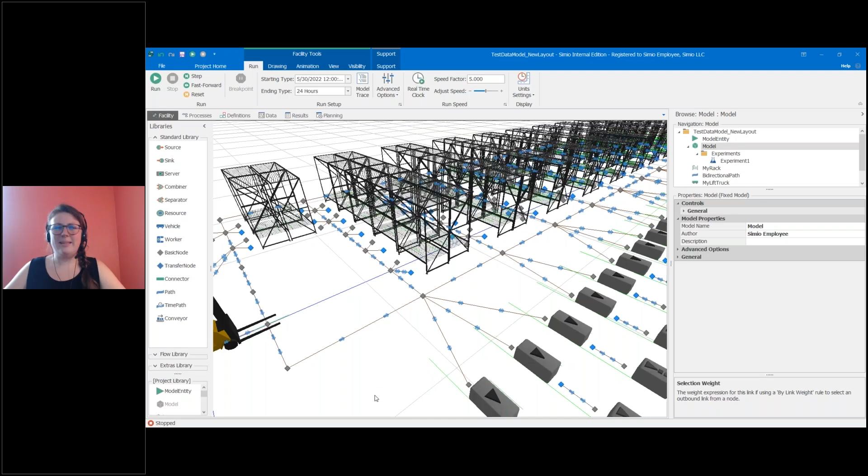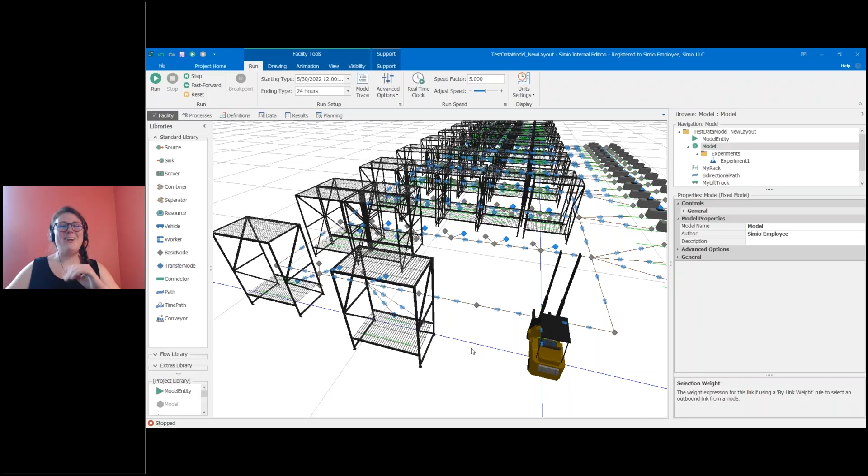Okay, so we have a shelf and we have different storage locations on each shelf. All right. Yeah, that gets into a little bit of trickiness with the shelf and the rack object itself. So the rack is a special object. Again, it comes from our extras library, and a lot of the objects in our extras library are composite objects. So they're made up of multiple objects within each other. So in this case, the rack is the object, but the shelf is actually an entity object within the rack.

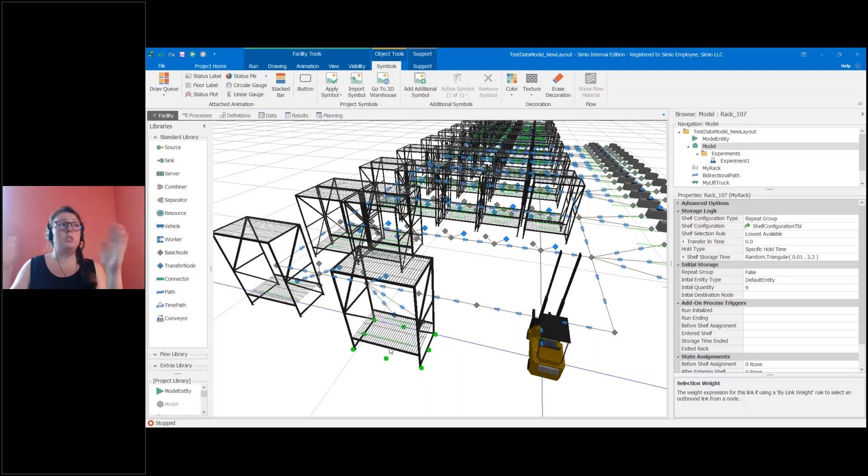So you would probably need to go into the shelf definition and say that you are going to have different storage locations on the shelf, so instead of just storing into one place on the shelf, you have 5 options. So it would be more at the shelf definition level, I think, than anything. Or there's probably other ways to go about this. If you wanted to say, I still want to put them all onto this shelf, but maybe you want to break it down at the top level.

So you could think about instead maybe expanding your shelf data and saying, I have shelf 1 and I have storage location 1, 2, 3, 4, 5. Yeah, that's a little bit of a tricky problem. I think I might have to think about it more if you didn't want to have to change the object definition. If whoever asked that would like to chat about it more, I would recommend emailing Dan or support, and we could brainstorm more on that.